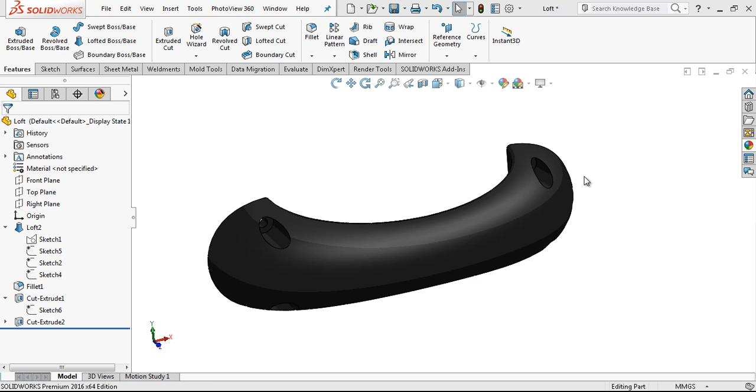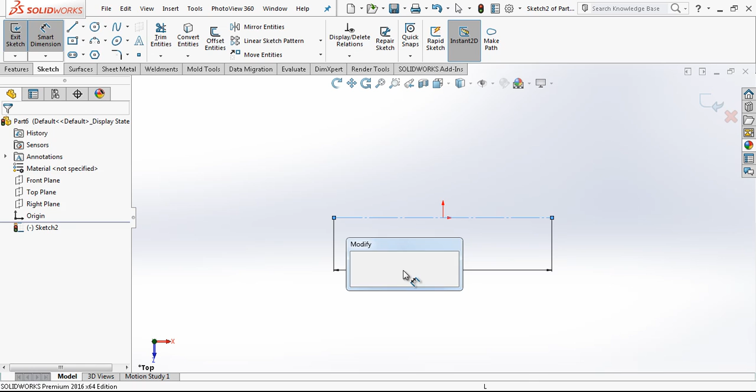In this video we are going to be modeling this plastic hand grip. We want to open a new part and start with front plane. In fact, I want to start with top plane now. I just placed a line here with the midpoint option, in the middle of the origin. When I give a 200mm dimension, 100 will be here and 100 will be at the other side.

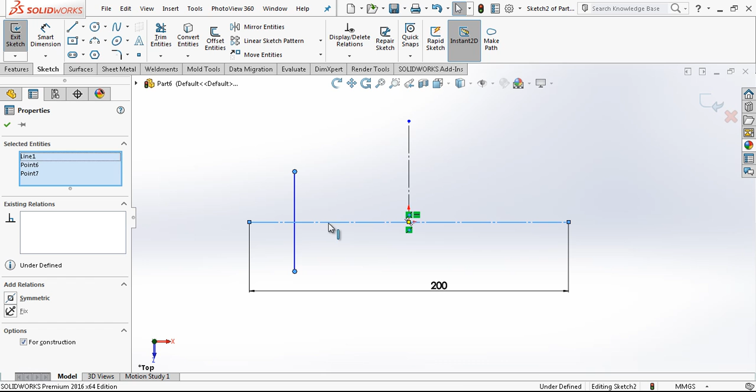That's why I made midpoint relations, construction geometry, and here a line. This line will be symmetric on this construction line, the length will be 60, and the dimension from here will be 35. And for tangency I'm putting a construction geometry here.

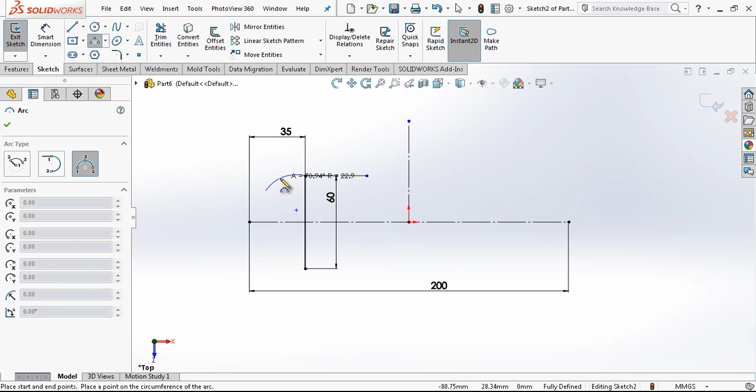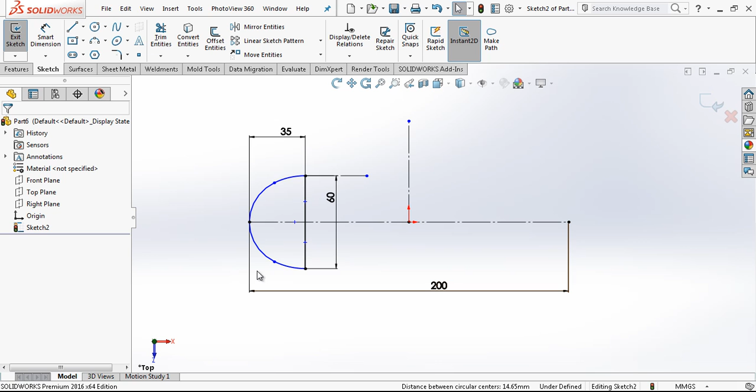After this operation we just make a mirror, and radius, arc and midpoint and tangency. Here also tangency, let's give. This will be 45, and after this operation it becomes fully defined. And mirror entities: we select the object to mirror at the other side. The first operation is done.

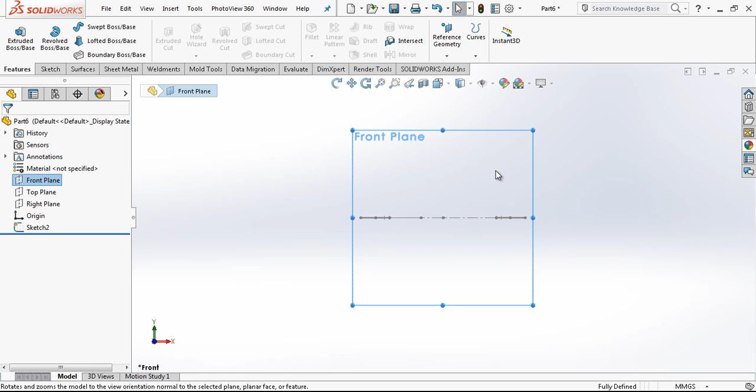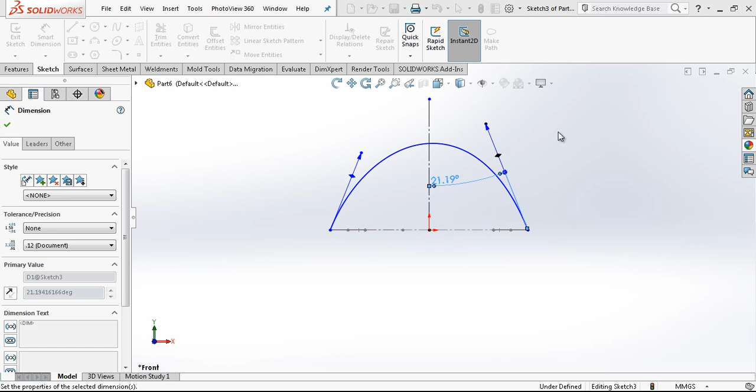Front plane, now I'm going to create a sketch. There will be two splines here. Sorry. One. Outer spline. Let's define it first. It's 15 degrees, 15 degrees on both sides. The 250 tangency value. This value is a unitless value, not millimeter or something.

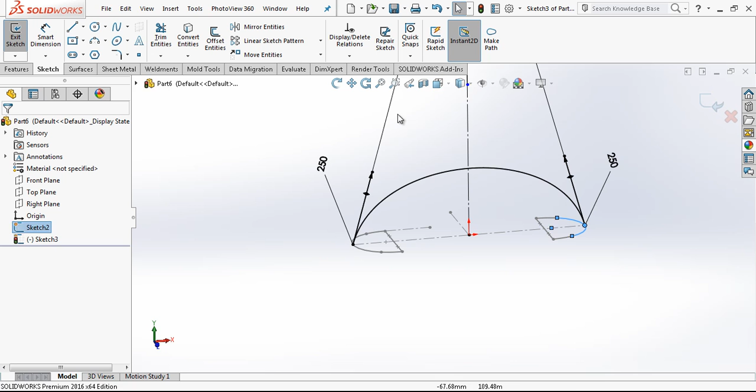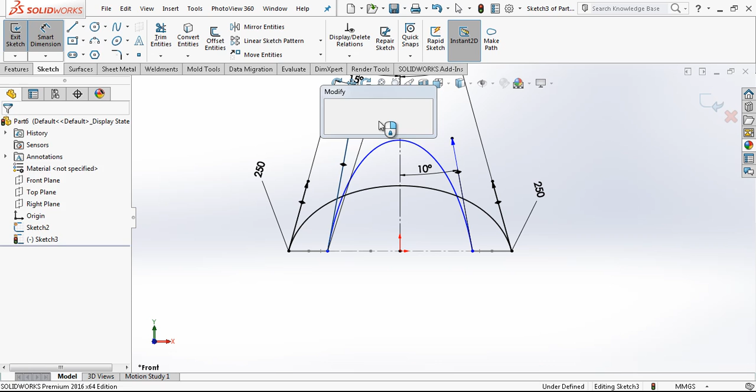We made it fully defined, and now the second is going to be placed here, and then I am changing my control points, and then 10 degrees, the other 10 will be placed here. After this operation we just give 170 tangency value. The only thing is we are going to make the last relation. As you see, it is fully in black.

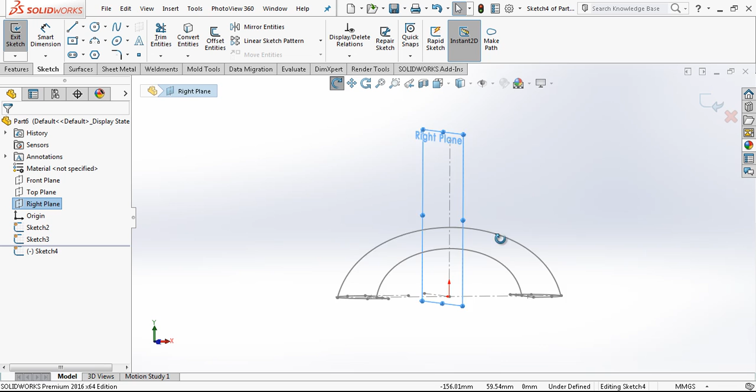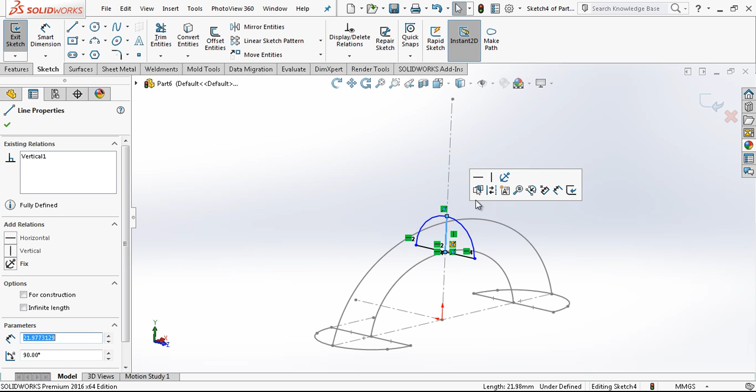On the right plane now we're just going to create a last sketch, and we are having a circle, and we cut it in half. On this line we're adding a pierce, and with this point and this spline add one more pierce, and the profile is done. We can go further with loft.

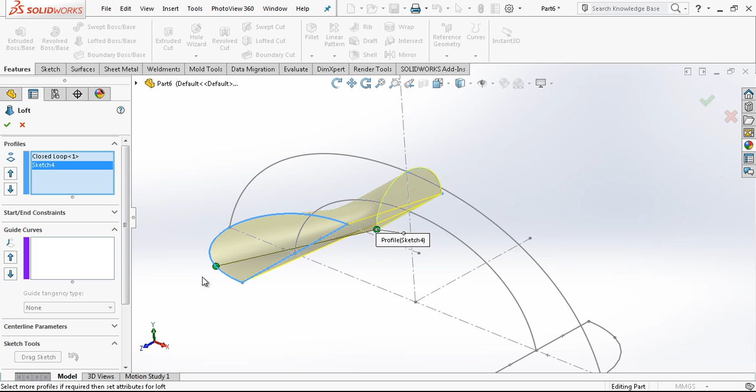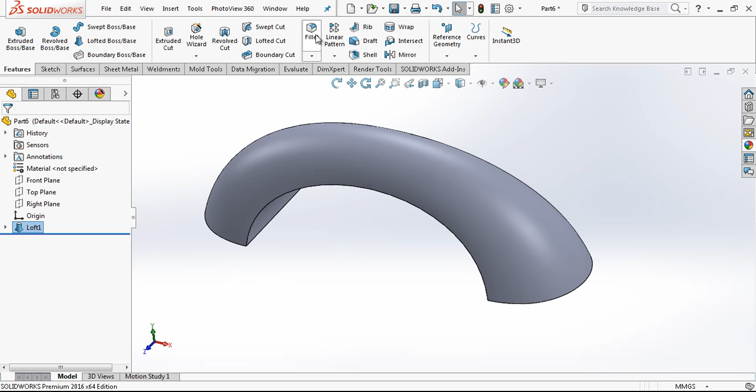First profile, second profile, and this is the third profile. Yes. And then the guide curves, in and out. This is what we are searching for. After this operation we are going to create here radius 2, and holes for connection

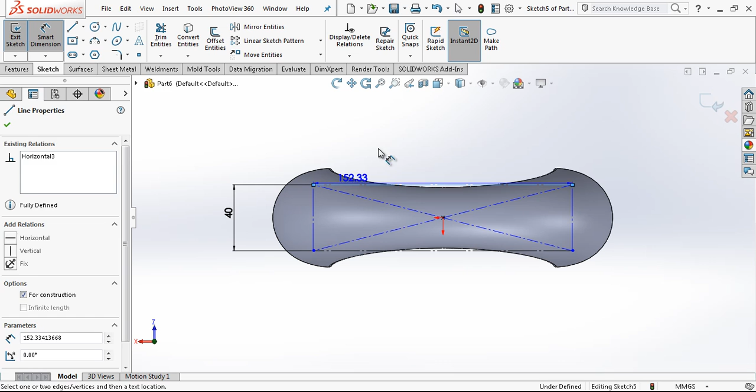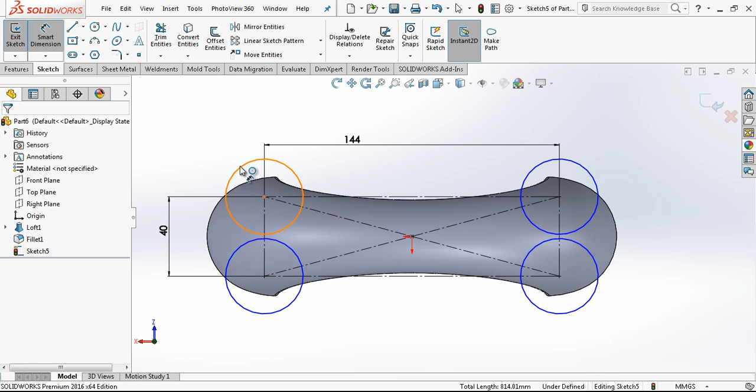from top plane. We look and we create a rectangle here. Select chain, I'm selecting everything. 40mm width and 144mm center, and 5 times 4 circles, and I'm selecting all circles while my control button is pressed, and then giving 5.2 diameter and extrude cut through all.

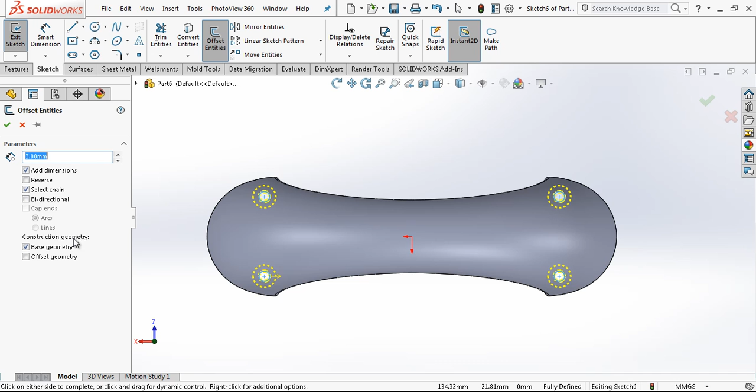And again at top plane we just convert all circles, selecting all of them, 3 mm offset out, and the base geometry is going to be construction geometry. And then we just tell our cut extrude to use an offset. First let's make a 10 offset from the beginning,

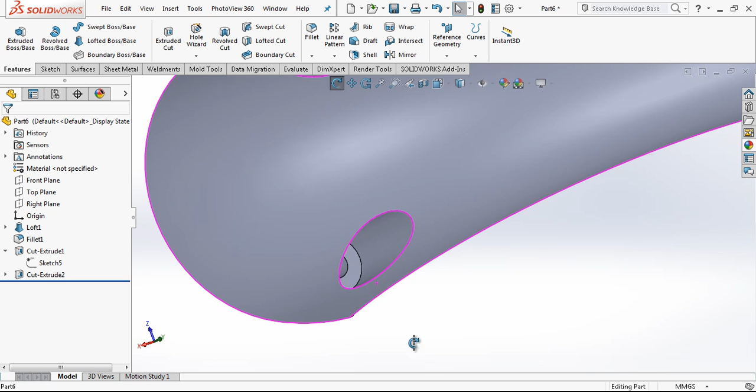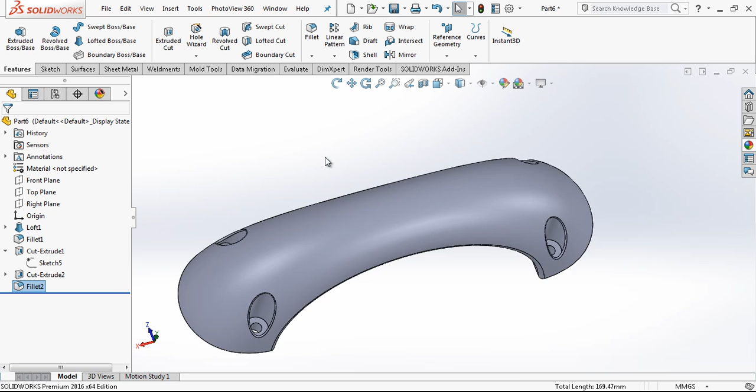sketch plane, top plane. We made a 10 mm offset, and we start cutting after that point. We can make it 8 also. This is what we are searching for. There can be little radiuses here. Yes, this was a nice loft example.